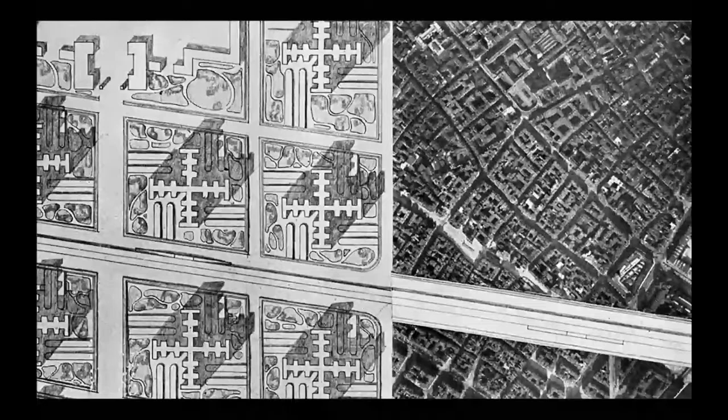Raphael, yes, one quick thing. So we will share this. Christian, I will do a part, and Christian will do a part. Ah, okay, perfect, yeah.

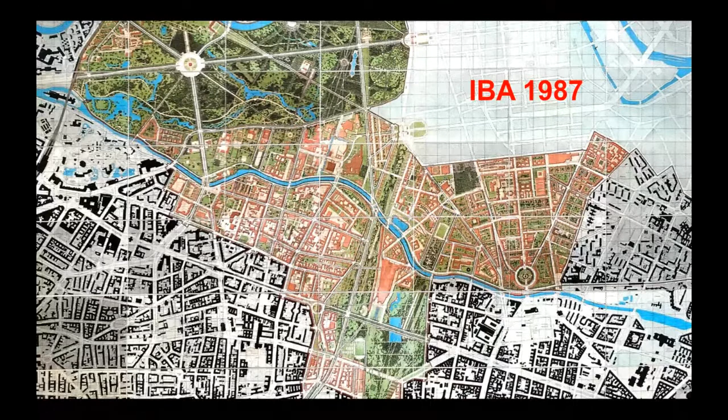This was the first really innovative moment, and the second one in terms of pushing architecture was another building exhibition in '87. This building exhibition is much more about the existing fabric and the question of not rebuilding the city as a modernist plan, but thinking about the existing fabric and how we could engage with it. It was a huge competition. Both projects were also about social housing, a parallel idea of making architecture, making city, but also producing models of housing supported by the government.

Here you see one project from this second IBA, one of the early projects from OMA, where they made a new building at Checkpoint Charlie. This was one of the most important transfer points between East Berlin and West Berlin, and this was the place where the trucks would go underneath the building. Just when it was finished, the wall came down. So it's existing, but it's not a border anymore.

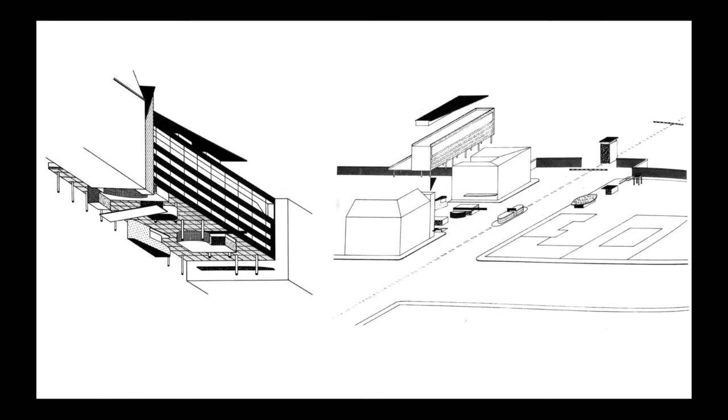But at the same time, in the second exhibition there was also a strong movement of participation, of political activism, about who owns the city, who owns the place. So there was an IBA, International Building Exhibition, about new projects, but also about existing projects. And there was a sort of fight for the rights of the city, which still exists, and exists now even more because of rising rents.

There was another building exhibition in parallel that would really try to work with different models of taking over existing structures, thinking about rent models, thinking about sharing spaces, new habitations. In this tradition we came to Berlin, and I started my office in a phase where all this was a bit over, and the boom in Berlin was also over. So in 2000, at the turn of the millennium, there was more or less no work.

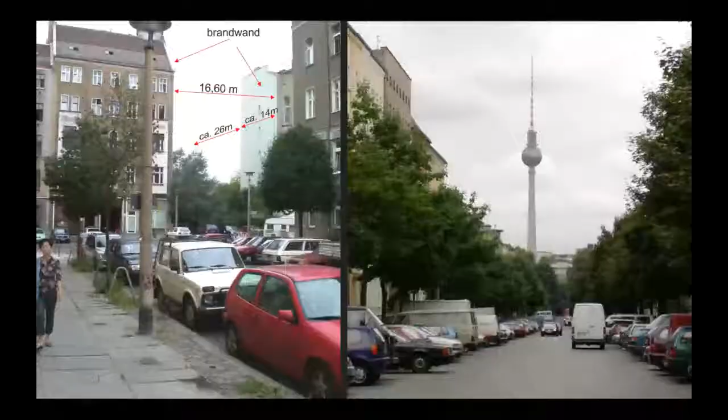So we thought maybe one way could be to become an entrepreneur in a way, as an architect, a developer, a financer, and also make the design, think about the use, and do everything ourselves. Somehow we had the chance to get a site. So you see this is the site, it's a firewall on each side, so you can build all the way to the edges. We bought this site ourselves, privately.

We realized already it's a very interesting place with the view to the TV tower. We knew that the space would have potential, and we started to think about a building that would exist there. The only way we could build this building was not through the model of getting a bank to just pay for it—they said they don't take any more risks in Berlin—but only through finding a group of people that would become the investors. So each team that would move into this building would also become an investor. And we thought that would allow us to really think about very different programs, very different types of flats, but also other ideas of relationships to the city.

We realized that this is the most crucial part of these projects—it's not only about the private space, it's also about the relationship to the city, to the public space. What you can see on the left is the view that you just get for free, but they wouldn't allow us to make any balconies on this side of the street. So we decided, okay, maybe this is a very interesting question: could we still open the place to this street?

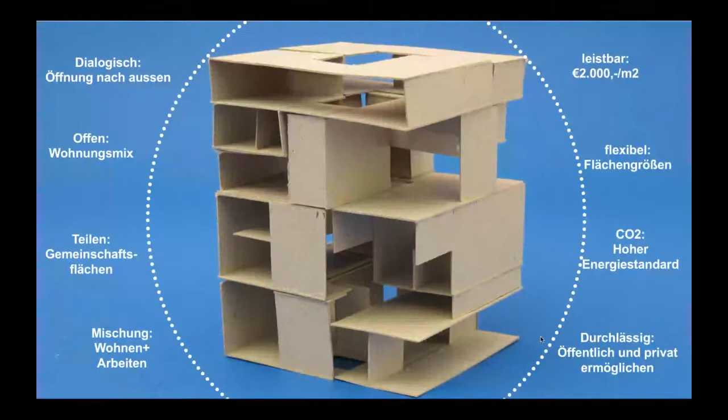Then there's a question of how complex it can become. What can you offer with the place, not only in terms of what the building looks like, but also in terms of possibility of usage. So you can see here different types of flat typologies, but also the idea that you could also work in the building. When you take it apart, you realize this is the potential.

It made from this either spaces, flats where people weren't very interested in walls and would rather share one big space, or other flats with two floors, very narrow, but with a very tight program. So you see at the bottom something very tight and complex, and at the top a very open space.

This model allowed us to work quite individually with each person moving into the place, because they would not only be our client in terms of design, but also share the risk of the project, paying their own share. So the relationship to the whole building process and to the place is very different.

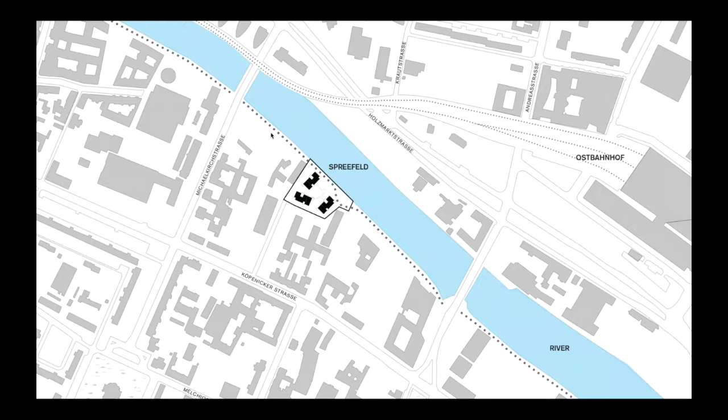What is interesting is these intermediate spaces, the rest spaces, leftovers from the time when the wall was up.

In that period, a lot of the sites have not been developed. They are still sites either from the bombings of the war, or sites that have never been filled up. Then it became this beach bar, and this would be a typical situation after the wall came down, where you would take over these spaces and live there in a way, very informally.

So we thought we should keep that kind of character—this is the strength of the city—and at the same time, we should change the character. Here you can see our project, these three buildings. It's a very open plan, open towards the river, so not closing it towards the river, and open towards the city.

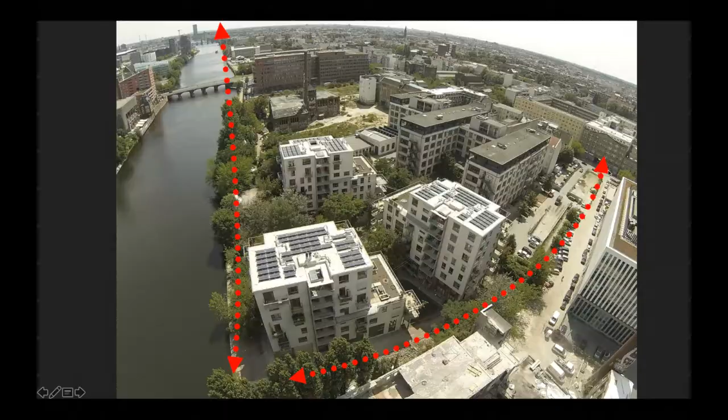The idea was to make this whole stretch along the river public, which the city didn't really intend, and we pushed hard to say this should be a really public space. As a consequence, we kept all the ground floor public and made this relationship to the city strong. Here you see the plan—it's a very inviting layout, but also makes a sort of intermediate space in the middle, allowing every building to have a relationship either to the river or to the south. Up here is north.

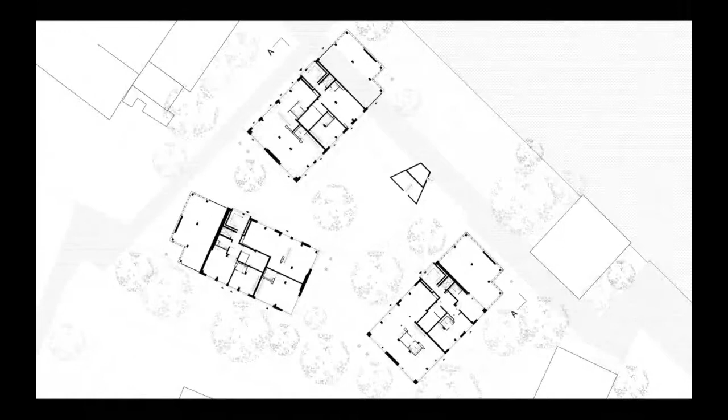This is the situation from maybe a month ago. I had a photographer, and I asked him to take a picture showing the building and at the same time all the plants. The only moment we could really get this was when the leaves were just coming out, so we waited half a year for this moment. You see, typically it's completely filled with plants, and you wouldn't see the buildings—it's very difficult to see them. That was the plan, that we would not take away the plants.

How we did this, I will show you in a minute. To make the ground floor public, we decided we need to be really clear about the program, because you cannot make a space public without somehow making it alive through the program. Otherwise, people will not feel comfortable in the space.

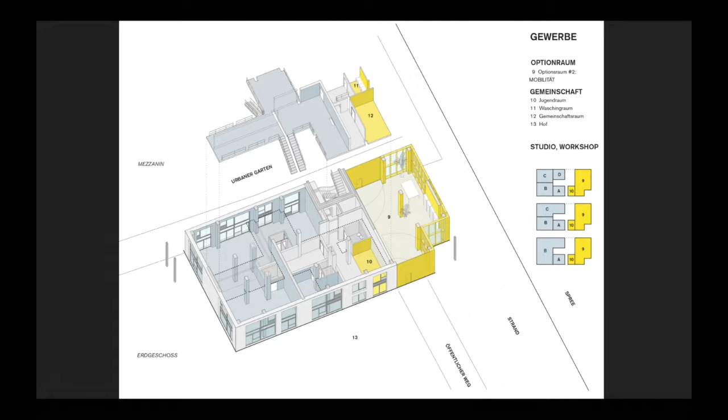On the left side, in the blue area, you see very flexible units for any kind of work. On the right side, you see a yellow space—this is what we call optional space, a space that we haven't finished. We left it open because the corporation wanted to finish it themselves, to use it for very different uses, as you will see. So this is now the moment where you come into the project.

You can also hear we have these crows here—I guess you can hear them, but I can't close my window at the moment. It's broken, so you have to live with all these birds in the background.

On the right-hand side, you can see this is the kindergarten—it's technically a public kindergarten, but we offered the space for it. On the left side, you see all the program as well. The kindergarten is very active until 4 or 5 o'clock, the offices are active until 7 or 8 o'clock, and then the optional spaces start to be active. So there's 24-hour activity, including all the people going home and going out and whatever.

Also here you see one of the optional spaces—on each building, on the corner, there is this space. Here's another one, and what's interesting is that space has been taken over by the inhabitants of the project. In the first space, they made a wood workshop in order to build the spaces and also to build all the furniture. Now it's a wood workshop used by people from the city—you can rent it or do workshops there.

And there's another space, three of them, but this one is a particular space because it's a space where you can eat.

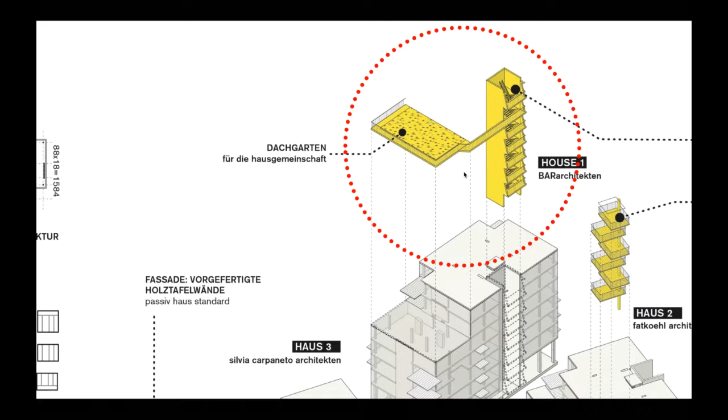This is part of the experience you have when you walk up. You have these views, even if you live on the ground floor, you can walk up and go onto one of these terraces, which you can see here. You also have these very big vertical gardens, which are super private gardens for each flat. So you compensate for not having the ground floor as your garden by putting the garden next to your place.

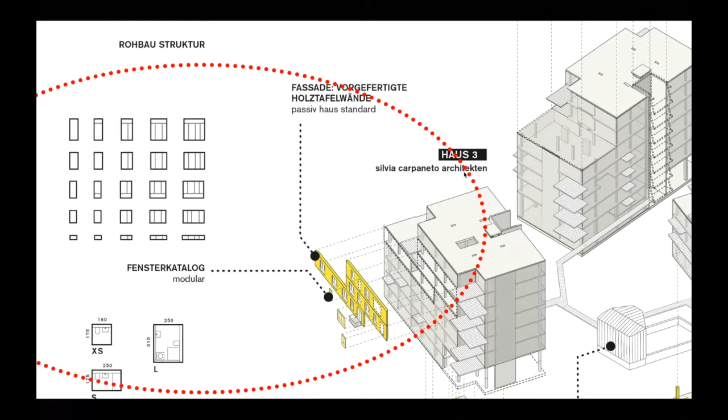We also thought, since we had to make very affordable housing, how can we make cheap windows? This is a project we did with two other offices, so it's a collaboration of three offices plus the alternative developer. We developed together a catalog of windows that are affordable but should do as much as possible for us.

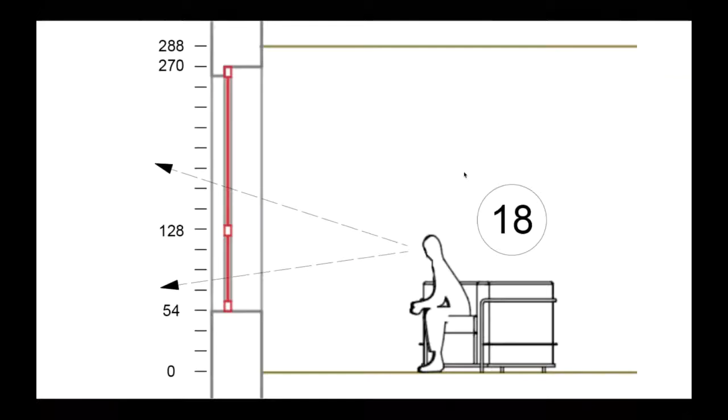The first thing is access to these balconies, but they also make the space transparent, and allow people, when you sit for a lot of time, to also have a view outside and always a strong relationship to the public space. That's what you see here.

At the same time, we could use these windows in a very free way on each building, so each of the offices would, at the end, plan one of the buildings with this kind of catalog. But then I could choose it myself - this is the building I designed, and I could choose this in the way I liked it to be chosen.

This is maybe what Raphael said before about the question, what does it generate? It generates the possibility to really test out new typologies. What you see here, we just talked about the ground floor, about different uses - the blue stuff is all the working areas, and the yellow stuff, the option spaces. This is almost 20% of the project about work.

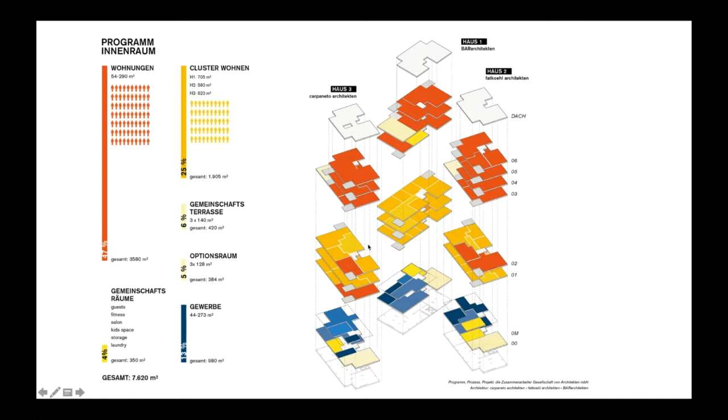Then you see the orange stuff, about 20-25% of the project surface, is shared flats, cluster flats, where you live together and share things. The rest, a bit less than half - about 47% - is flats that are used individually.

If you want to achieve such a variety of typologies, such a large scale of difference from very small to very large, you have to really think about the structure you put there that is still architectural. We had to reduce the amount of columns, concrete, and shear walls to the minimum. We also reduced the CO2 footprint by making the main structure in concrete, and this is timber.

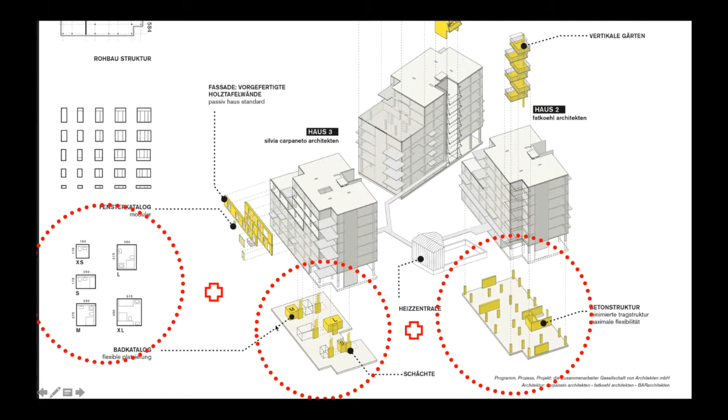We made these five types of bathrooms that you could just shift between the shafts, so we only have six shafts, and we shift everything between the shafts to allow this variety of flats. You can see this is a sort of one catalog of possibilities of flat options - about 42 options, but there are more typologies. You can see already that it's a very flexible idea of varieties.

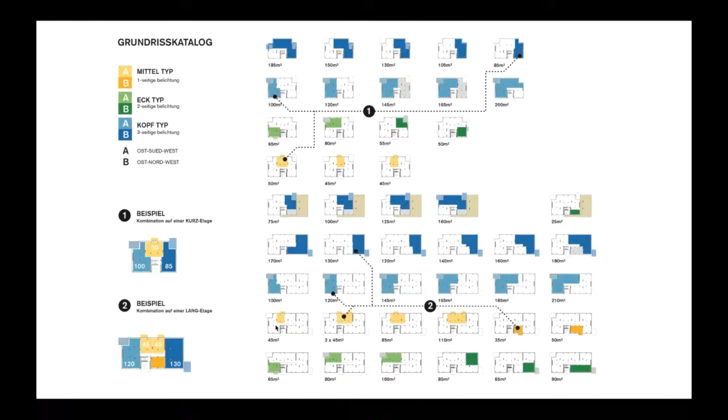Here you have a set where the clients could start to develop the flats with us - you see the bathrooms, the wall types, and the main structure. You could either take a very empty flat that you fill up and make it look like this, including you could also order a cat.

Or you would decide, because I can't even afford to live in a place like you've seen before, to share a flat. This is what you see here. All the yellow space is the space you share, and the living room is at the river, so it's the best place. The kitchen is very nice, but it's placed where there's the least light. Then these are all flats where people live with a window, like a street, and they have a bit more comfort.

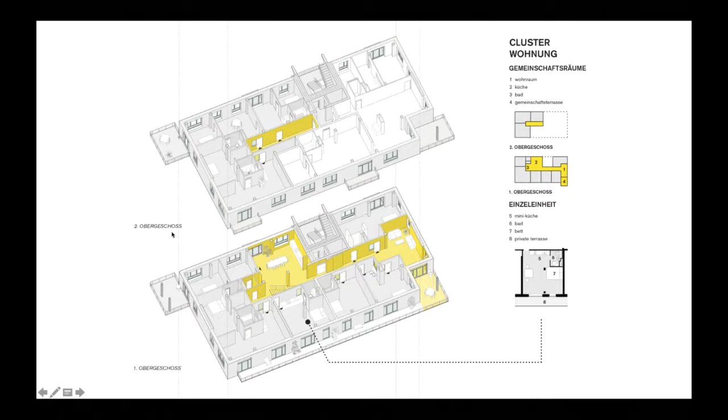They wanted this comfort, so they have a small bathroom and a little kitchen. If they can't deal with these people anymore, they can pull back for a while and then come back again.

In other cases, like this one, you have people living on 600, 700 square meters, sharing 80 square meters. So they might have just a room of 20 square meters, but they share 80 square meters, and they pay much less, of course, because they only pay a share of the 80. So maybe they pay for 25 square meters, but they live on 100 square meters.

So this is the interesting bit about sharing: affordability for us doesn't mean we stop making architecture because there's no more money, but it means really thinking about new ways of living.

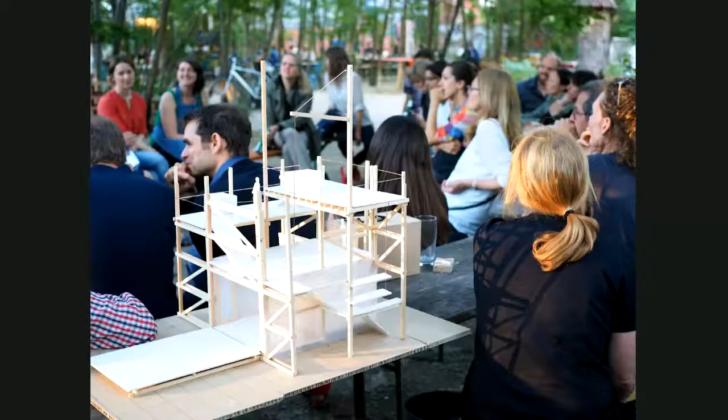Back to the garden, there was a similar question, because, as I said before, it was a temporary project, and the discussion also started: how can this project become a long-term solution for this land?

And in order to engage in this discussion, Florian and I, as Quest, proposed to erect a participatory vertical garden to make the statement that this land is, so to speak, common land, and has a long-term viable impact on the city, and needs to stay there.

And this would also be the space to create room so that negotiations between the local communities and the city can take place. So it was also introduced as an alternative model of building in a participatory way.

We proposed this structure, which we discussed with the community and the garden. It was designed by us, but it has been developed out of specific principles that are part of this idea of sharing resources.

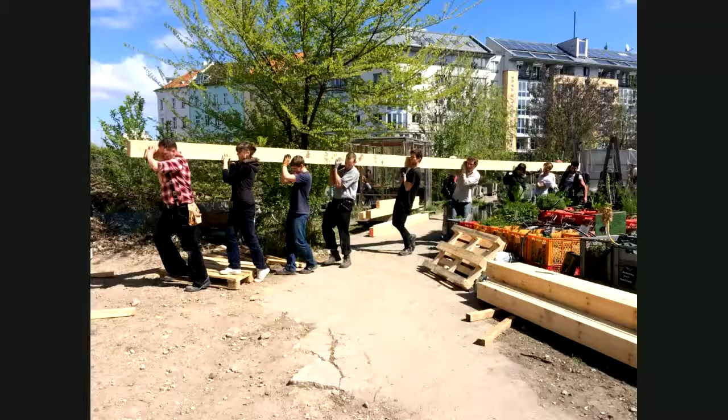And out of these discussions, this model was the result. Initially, we started to build it, so we didn't use any big machines. In order to build this structure, we had 10-meter high beams, which we brought by hand to the building site, and erected it on the site.

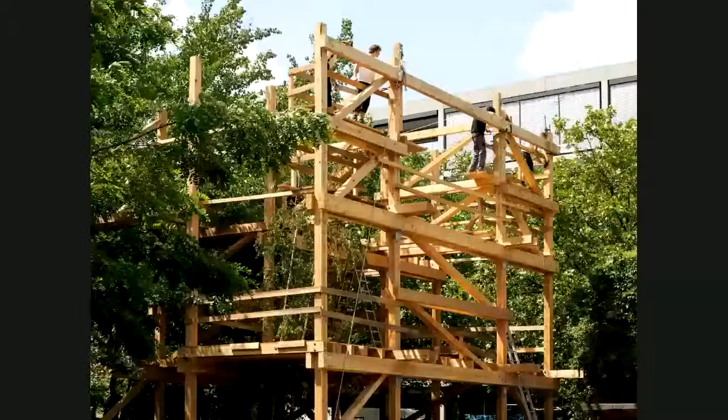Here you can also see how this structure is connecting to the city. Then in the last phase, we started to make it green, and that was also the beginning of the many discussions that happened there.

And the output of all this discussion at the House of Statistics was that they decided to create a five-way partnership called Koop5, in which the city of Berlin collaborated with the local district of Berlin, Bezirksamt Mitte von Berlin, with the local real estate management company, and a housing company as a communal housing estate company.

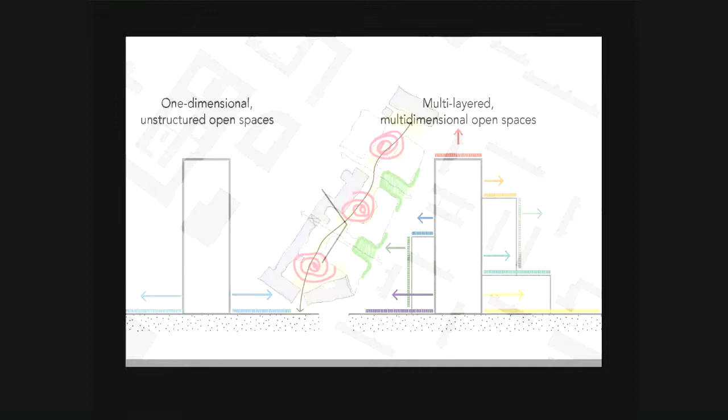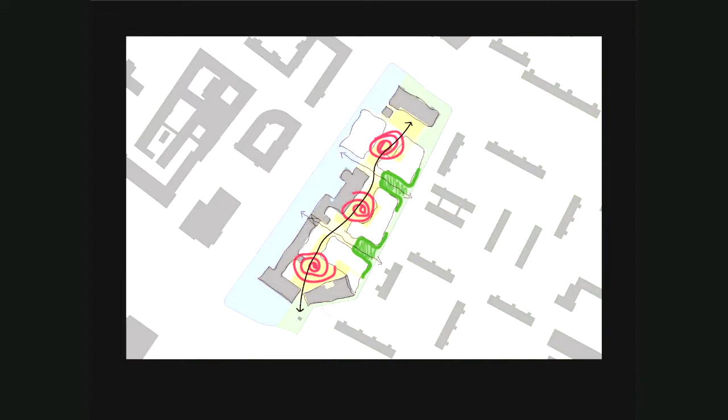So here I show you another sketch from this workshop competition, where you can see that the interest is really that there is a sort of transparency, that this block is not so monolithic anymore, that there are different courtyards, and there is an engagement with the surroundings. And just to finish the presentation, I want to give you a view from the top of the House of Statistics into Berlin.